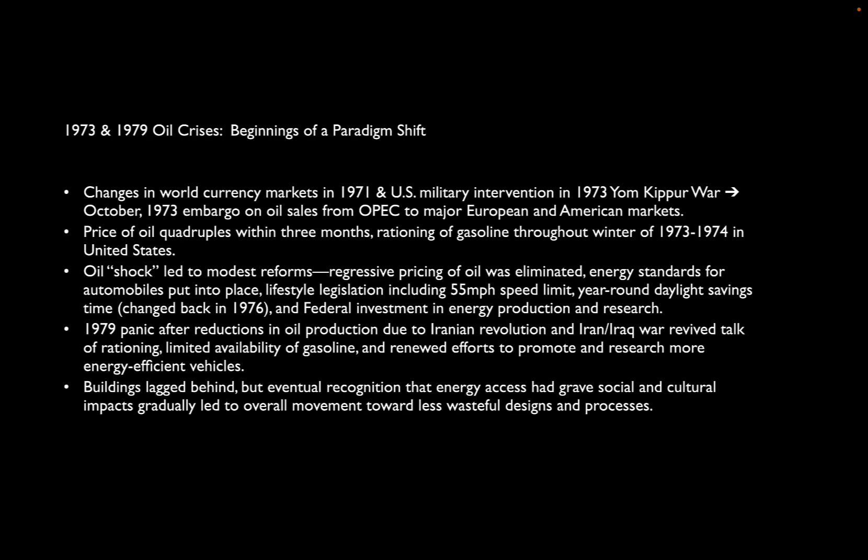And there's an idea. Myron Goldsmith, an architect that we looked at briefly before, in a later version of his famous essay, The Effects of Scale, pointed out that part of the problem with energy supplies like nuclear energy was that you were putting all your eggs basically in one basket, and that as you relied more and more on these sort of overscaled systems, the possibility that something horrible would go wrong was greater and greater.

So we faced real choices in the 80s, and among the ways of addressing the energy crisis was the idea that our buildings could use less and less energy, that maybe by lessening demand, we could avoid the supply shocks that we'd seen in the previous decade.

If you look at the way that the terminology evolved for a long time through the 70s and well into the 80s, there's this idea that you could solve the energy problem in sort of bits and pieces. So there's a lot of research done, for example, on super insulated houses, and that sort of peaks around 1980. There's also a real interest in passive solar that peaks also around 1980.

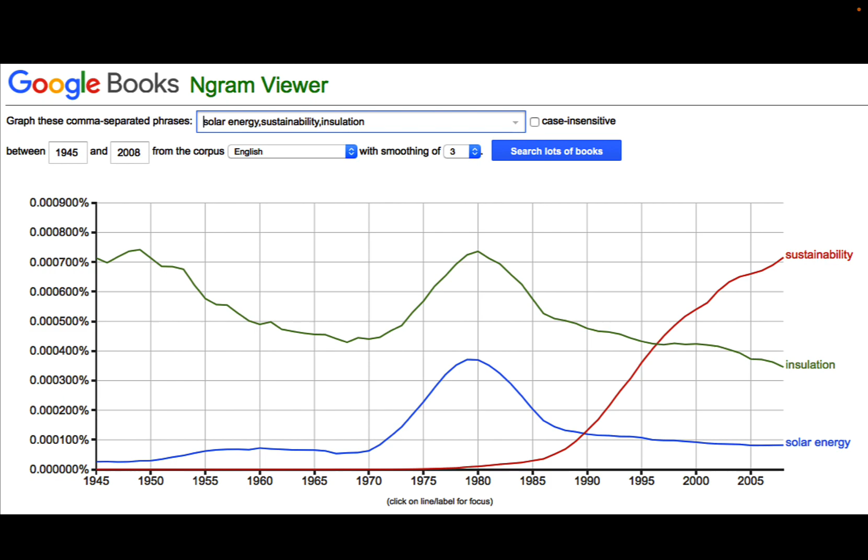We see, though, that the interest in energy savings does take off, and it takes off in a sort of grassroots way, particularly in the 1970s. So there are a lot of homeowners, for instance, who get very interested in heating their houses using solar energy. Edward Mazria's book, The Passive Solar Energy Book, is a bestseller, and it talks about how to orient your house, how to shape your house, to take advantage of the kind of natural solar energy that's going to hit your site over the course of the day, and then also, of course, over the course of the seasons.

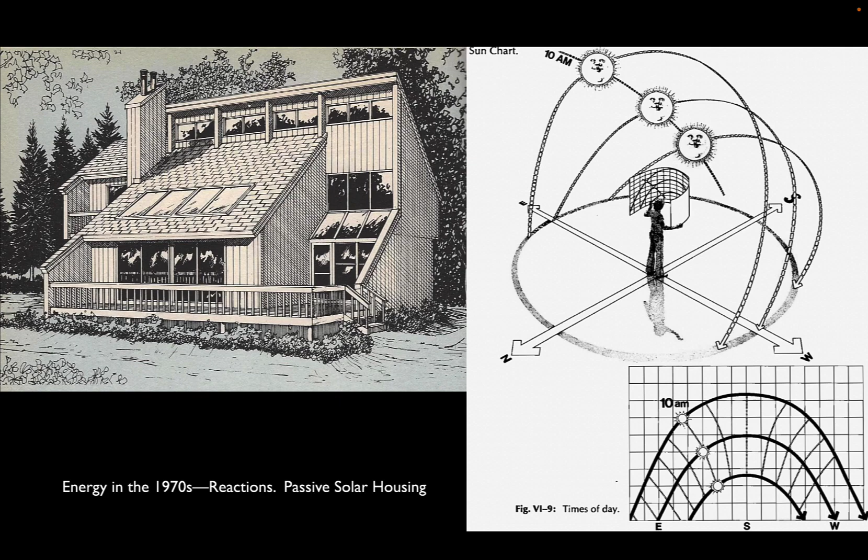Here you see a couple of images from Mazria's book. You can see on the left a sort of very typical kind of late 70s passive solar house, and on the right charts that Mazria uses to show how even lay people can understand the way the sun moves through the sky, and therefore the way that homes can take advantage of that natural energy flow.

There are a lot of experiments in solar housing, some of them more successful than others. It is associated, of course, with the kind of countercultural movements of the 70s. If you can use the sun to power and heat and even cool your home, then you can drop out, right? You can go off-grid. You can build a dome home in Drop City in Colorado as early as the 1960s. Or you can build one of these sort of alternative homes in Texas or in California that use solar energy to power or to heat or to cool much of the home that you're building.

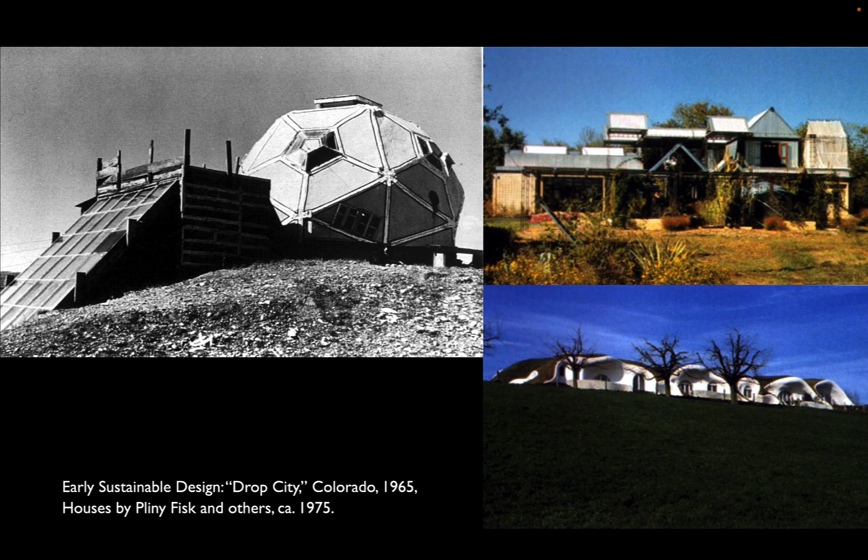These are very, very small scale interventions, of course, and they don't have any sense of the broader implications or the broader problems of energy production, energy consumption as a society. They're reducing the problem of energy use to an almost microscopic scale. Some of these are wildly successful. There are homes that completely heat and cool themselves passively that are built throughout the 60s and 70s. But again, they don't do much to address the overall national and international need to address energy consumption.

There are other things, though, that do begin to look at this. We looked at Bucky Fuller and closed our lecture on Fuller and others with his idea of world gaming, of using, in this case, this map that he either invented or sort of borrowed, the Dymaxion map, to show how resources are unfairly distributed throughout the globe, and how we could find both political and technological means of better sharing them.

And Fuller was profoundly interested in the way that the energy economy contributed to this inequality on the one hand, but also how it might be able to contribute to ways of addressing that inequality on the other.

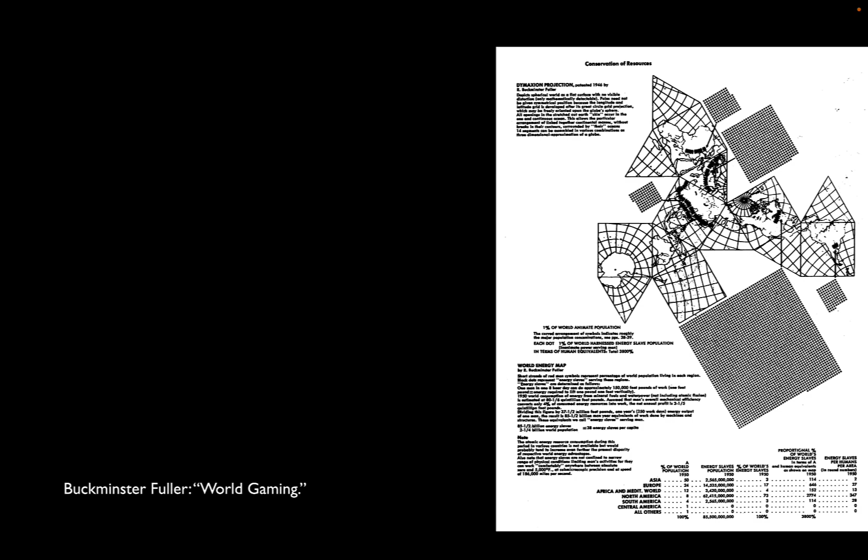Looking at the problem globally also brought home the idea that building construction, not just houses, but commercial and institutional, industrial building, transportation building, also had a huge, much bigger role to play probably than the individual kind of drop city houses that we saw in the 60s and 70s.

Here in 1996, you can see the U.S. Department of Energy pointing out that the way that residential buildings and commercial buildings used energy was very different. Passive solar works well for residential because most of your energy over the course of the year goes into heating it, at least in most of the northern 2/3 of the country. In commercial buildings, though, it's very different. Most of the energy goes into lighting and cooling the spaces instead of heating them.

This was true in the 90s. It's even more the case today that we spend more energy cooling than we do heating our commercial buildings. These sorts of realizations that energy use in buildings was complicated and that was tied into much larger networks led to early experiments that really did look at how we might change the way we build or change the kind of formulas for how we build typical buildings to look at reducing those kind of big ticket items.

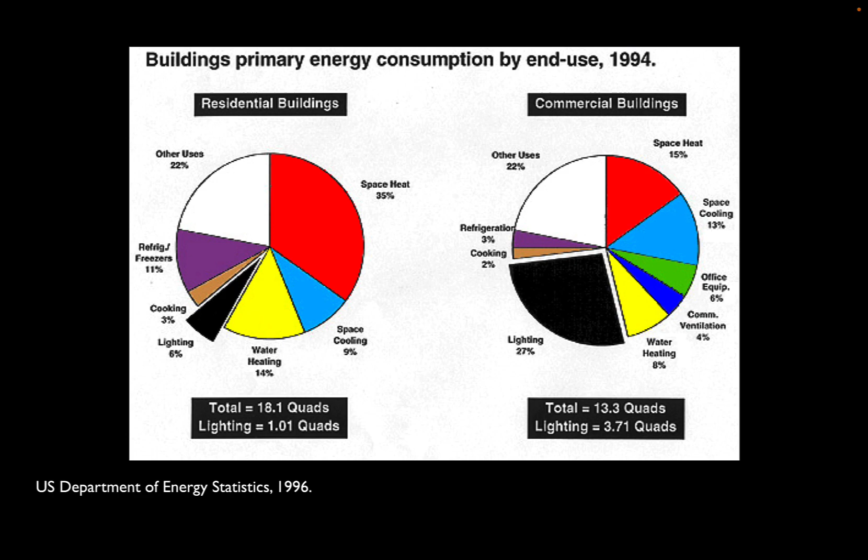Passive solar works great for residential. In commercial, though, we've got to find ways to bring in daylight without bringing in a lot of solar gain, right? So the balance between lighting and cooling becomes more important.

Some of the early experiments in what today we would call sustainable building come in the sort of high-tech movement. Architects and designers and engineers who are looking at building performance and understanding that there is a gradual shift in how we think of a high-performance building from a lightweight structural building to one that really manages its energy more efficiently.

One of the earliest large-scale versions of this is Foster Associates' Stansted Airport outside of London in the UK, which has a kind of long design and construction history, but stemmed from the realization that looking at the terminals that the British Airports Authority had built in the decade previous, there were fundamental problems with the conception of these airport terminals that went against a more energy-wise method of cooling them, but also of lighting them.

The design team looked at typical British buildings where you have kind of long span truss roof structures with mechanical plant on the roof and distribution through the roof, but also through the floor. There's a limit, of course, on how high you can build near an airport. You don't want planes running into your air conditioners.

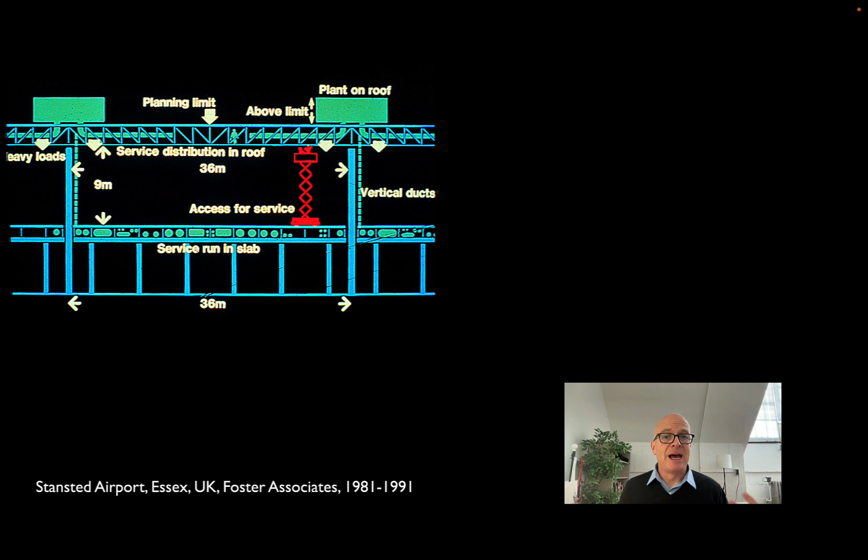And so that restricts the height of the concourse to about 9 meters, 27 feet, and requires you to access the ductwork through cherry pickers and ladders and things like that, right? All of the ductwork is up in the ceiling, and there's no way to bring daylight through that ceiling.

Early on in the Stansted design process, the team wondered what would happen if you just kind of reversed that. If you took all of the mechanical equipment and put it on the ground level where you could access it easily, brought all of the ductwork up through the floor, so there's no need to bring cranes and cherry pickers into the concourse.

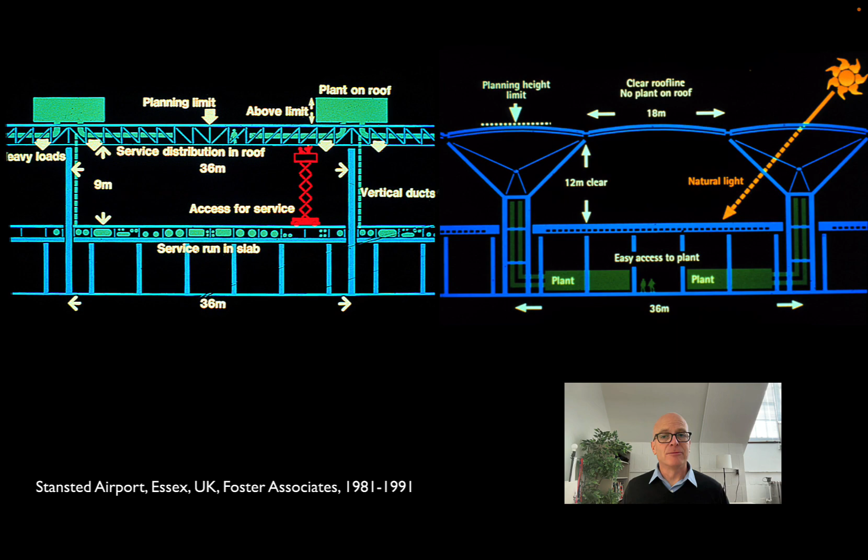And then within the planning height limit of a typical airport, using a very, very thin roof, how you could make that roof transparent, right? Bring in natural light to illuminate the concourse below and eliminate the need for a lot of artificial electrical light in the airport terminal. There were some very clear advantages to this: greater headroom, a lighter roof structure, less material, easier access to the mechanical plant below.

And what both Foster's and the British Airports Authority realized was that you created a much more generous space. Foster's idea was to collect all of the mechanical systems, the supply and exhaust, but also all of the signage, all of the lighting that would go on when nightfall came, to collect those within these little structural umbrellas. And that would open up the concourse for much greater pedestrian passage.

As you can see, there aren't a whole lot of openings in the roof. About 10% of the roof is glass. And with these diffusers that hang down from it, they were able to shut the lights off even during relatively cloudy days and save a tremendous amount of energy that they would have spent on daylighting. So as early as 1991, there is this idea that energy consumption is something that we should be looking at. We should be finding ways to organize our buildings so that we're using energy less.

We're taking advantage of the sun where we can, either for heating in residential construction or for lighting in commercial construction. At the same time, there are new techniques that are coming into play and new political and commercial realities that are beginning to change the way that we think about building.

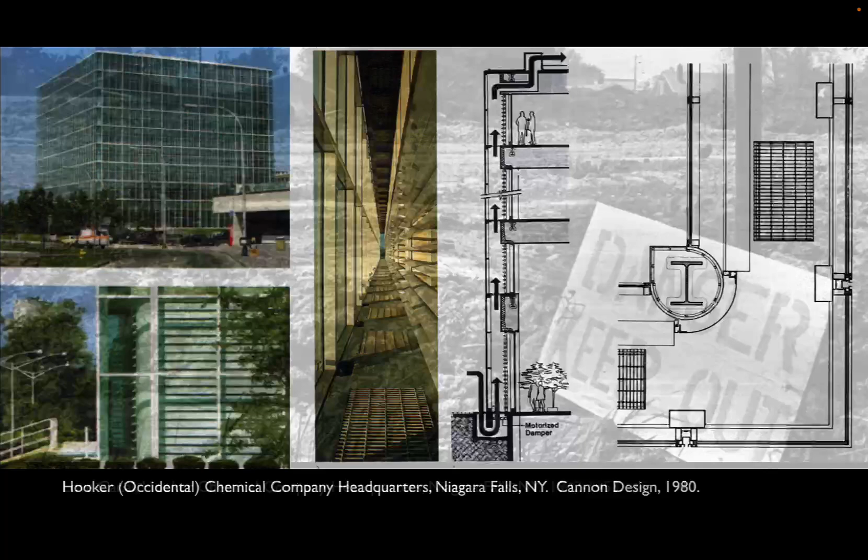The company got a tremendous amount of terrible press for this, understandably, and did two things. One is they changed their name to Occidental Chemical Company. And the second is they built a headquarters in Niagara Falls that they said was a symbol of their commitment to ecological rehabilitation. Cannon Design were the architects. This is 1980, and this is their headquarters building in downtown Niagara Falls, that used a brand new technique of not just heating, but also daylighting.

They claimed it was both going to reduce the amount of energy that the building used and make it a more ecologically friendly building. The term green building wasn't in use then, sustainable building wasn't in use then, but this was very clearly a giant environmental machine, but also a billboard, right? Something that the company was using to try to show that it was concerned about its reputation and concerned about rectifying some of the damage that it had done.

The Occidental headquarters used an early version of what today we would call a double skin. So there's a glass wall on the outside that is exposed to the sun and absorbs as much of the heat and light from direct sunlight as it can. Behind that, there are two layers. There's an inner layer of glass, a storefront glass that goes story to story. And there's a layer of basically Venetian blinds, louvers that can be adjusted to bring in more or less daylight.

This was almost purely a lighting scheme, a way to bring in as much sunlight as possible, but to exhaust the heat gain that typically comes with natural daylight. So you can see from the diagram in the middle that air comes in at the base of the double skin. The sun shining on the glass facade warms up the air inside. It hits the louvers and warms the air around it. That air being warm rises, and you can see that there are grates in the catwalks that run at floor levels that allow the air to come up, and that hot air gets exhausted at the top of the building.

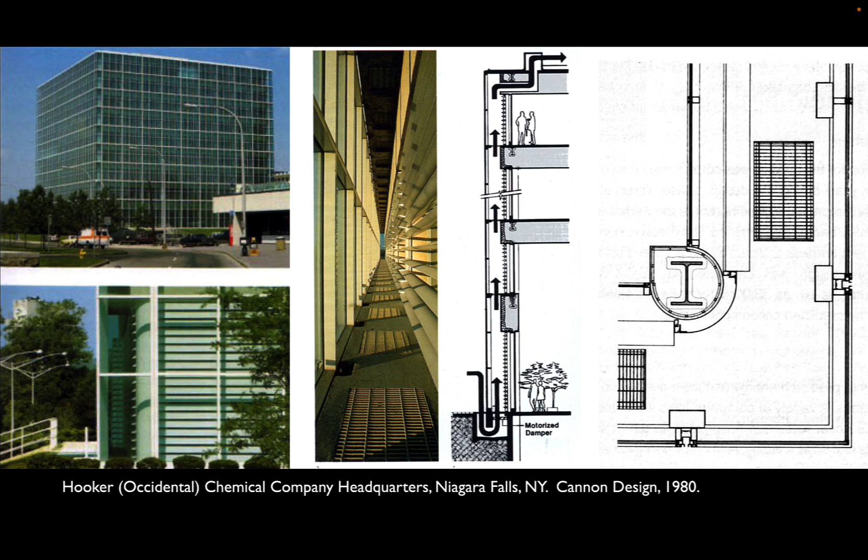It's not a perfect system, particularly in 1980, and the building was criticized for, among other things, having a similar facade on all four sides. This only works really on the south and a little bit on the east and west sides, certainly not on the north. But it's an idea that gets picked up 10 years later when Germany in particular, because of the taxes that they put on energy, is encouraging companies to find ways to save energy in their commercial buildings.

Foster & Partners is a leader in thinking about how the double skin can be applied to a broader range of commercial situations. So here in the town of Duisburg, a formerly industrial brownfield site that's trying to reinvent itself as a sort of Silicon Valley of Germany.

Foster's early building there in 1995 uses a double skin in much the same way that the Occidental building did, as a way to bring in daylight without bringing in a lot of solar heat gain. There are other experiments here, so using the core of the building as kind of shaded thermal mass, extracting air from that core and using that to supply the offices, so a temperate air supply that's pretty much always there.

Other ideas that didn't take off so much, like chilled ceilings, running cold water through pipes in the ceiling to more efficiently extract the heat from things like computer monitors and office workers. These never really caught on because of sort of intractable condensation problems.

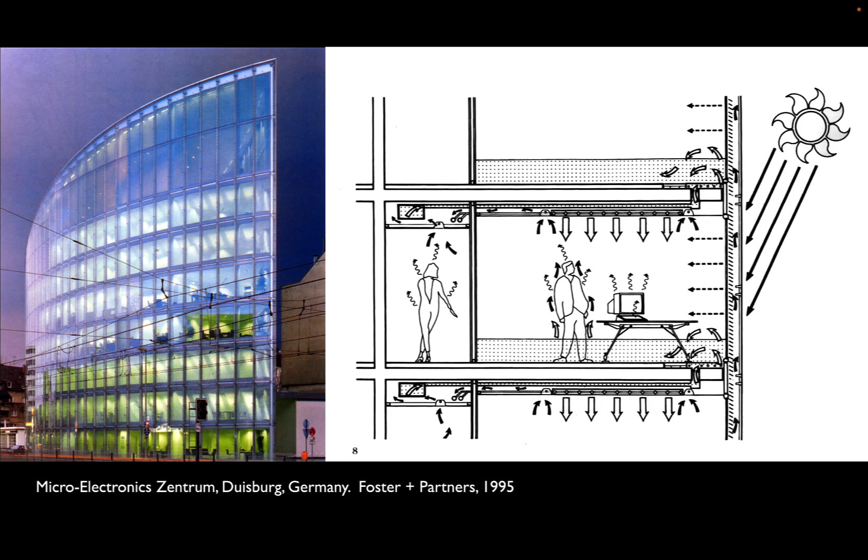But you can see the double skin beginning to evolve, not only as a kind of environmental mechanism, but also really as an architectural idea, that the depth of these skins gives the buildings a little bit more vibrancy, a little bit more grain to them than the single curtain walls of the previous decades.

You can see too that they're complicated. You have to be able to operate the inner skin so that you can clean the louvers. Dust is a sort of perpetual problem. And of course, having two glass skins doubles the price of your cladding. So there's a trade-off here between the initial cost.

Also today we would recognize the trade-off between the amount of embodied carbon in those two skins and a very, very long amortization. It takes a long time for these to pay themselves back. Not quite as long in Germany as elsewhere in the world because energy is expensive. It's taxed instead of subsidized.

But in the United States, for instance, the double skin really doesn't become a viable energy system until the late 2000s. And even then, it's sort of economically questionable. Instead, in the United States, there's a kind of tendency in the 90s to look to passive solar ideas to try to use the sun's path in the sky in slightly more clever ways. And this happens especially in hot climates.

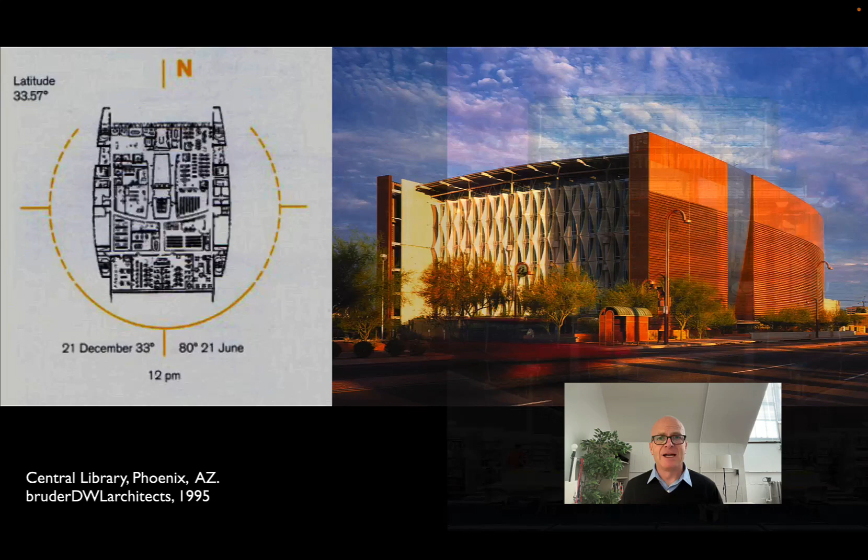And on the south side, using horizontal louvers to keep the high summer sun out of the building. On the interior, you can see that there's maybe borrowing from Stansted here, porthole skylights that look straight up where the sun never is in the latitudes beyond the tropics, and using those skylights again to illuminate the interior without bringing in a great deal of solar gain.

So by the 1990s, there is a growing realization that traditional energy resources are finite, that we are at some point going to reach what's come to be called peak oil, and that our reliance on fossil fuels is going to have to diminish. There's also a growing recognition that burning those fossil fuels has had an impact on global climate.

There is legislation, as I said, especially in Germany, that looks not only at research and development, but that also kind of promotes energy efficient design and construction by beginning to raise taxes on energy, both on coal and gasoline, but also on electricity, trying to encourage consumers, particularly large ones, to spend less and less. Even without that sort of legislation, energy costs begin to rise.

And with the recognition that oil is harder and harder to extract, in particular transportation, but also eventually buildings begin to respond to the economics, if not the moral and ethical implications of global warming, at least at first, the economics.

In the next part of the lecture, we'll look at some of the techniques that are used at larger and larger scales, how new tools were put to work to assess how energy flows across buildings and across sites, and how energy performance really became one of the major pushes of the so-called high-tech movement, a shift from looking exclusively at the structure and assembly of buildings to how they perform over time, over their lifetime, and how they use energy.